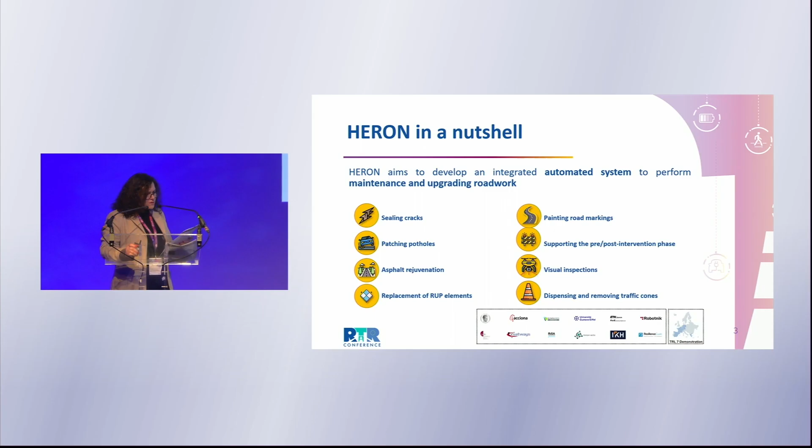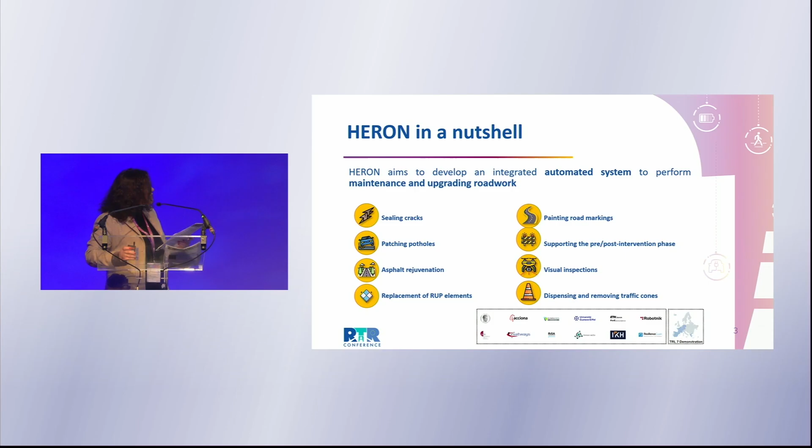The core philosophy of this project is automation and modular adaptability, focused on a single robotic system that can perform all the tasks. By integrating AI-powered vision, robotic automation, and real-time digital services, their project results will reduce manual labor and operational costs while improving safety.

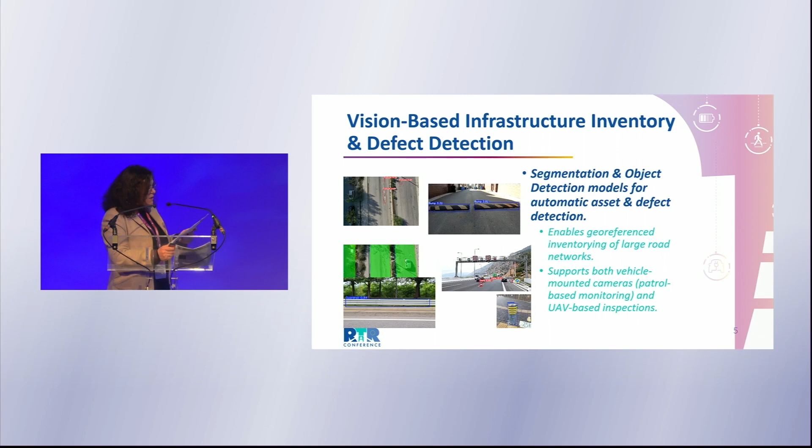So far, the results of HERON project are significant. Their technology allows for a georeferenced inventory of large-scale road networks. They developed two models: vehicle-mounted cameras enabling real-time monitoring via patrol vehicles, and UAV-based inspection providing aerial road infrastructure assessments. HERON project has developed an unmanned ground vehicle equipped with a robotic arm designed to do all-in-one road maintenance solutions.

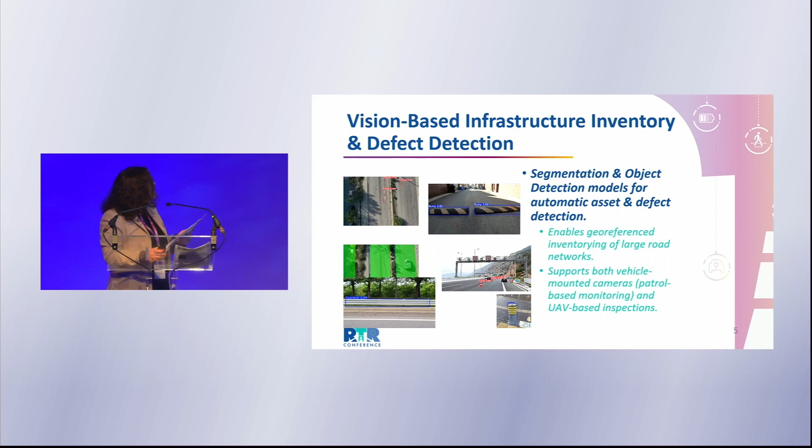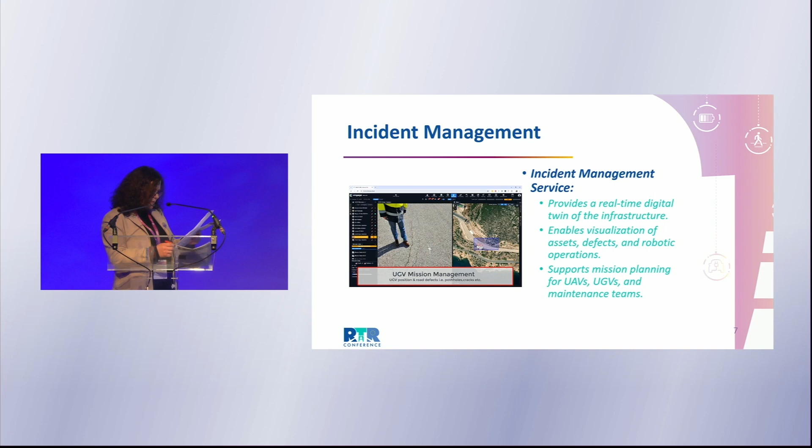For key capabilities of the HERON robotic platform, we have area closure, where the same robot is deployed to secure and seal all the surrounding areas, ensuring a safe working environment for road maintenance to begin. Pothole sealing is designed to automatically fill potholes and improve road conditions. Road marking repair ensures traffic lanes and other important markings remain visible, and crack filling pavers are designed to repair road surfaces by addressing cracks before they worsen.

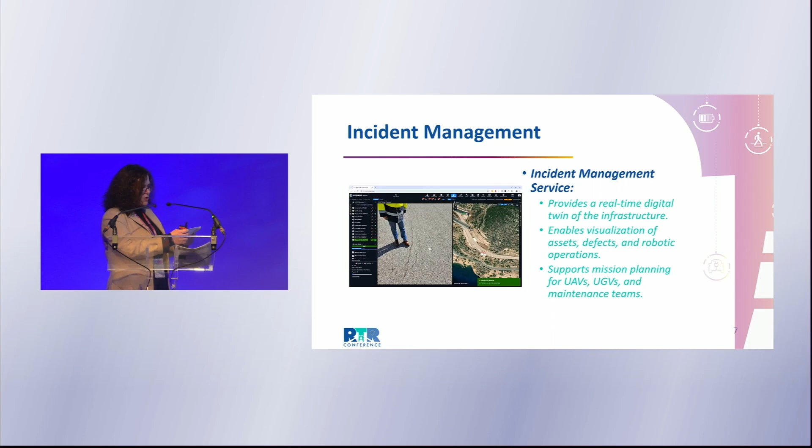Then we have the incident management service, which acts as a real-time view of the infrastructure with key elements like visualization of assets, defects, and robotic operations in real time, mission planning for UAVs, UGVs, and maintenance teams, and remote monitoring, which allows decision makers to track and supervise the maintenance operation from a centralized dashboard.

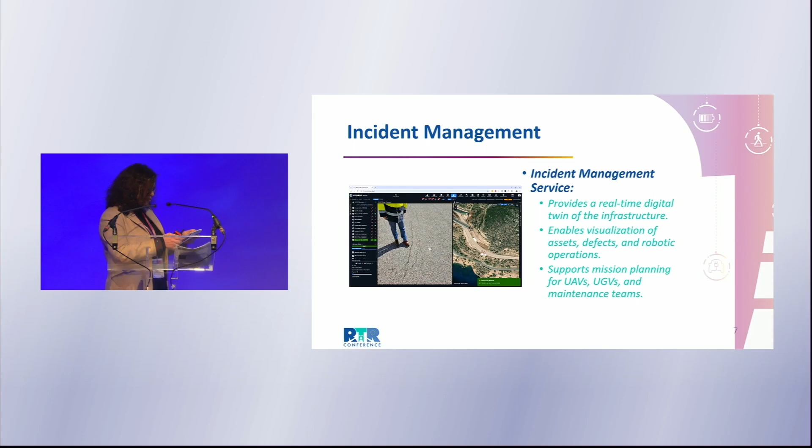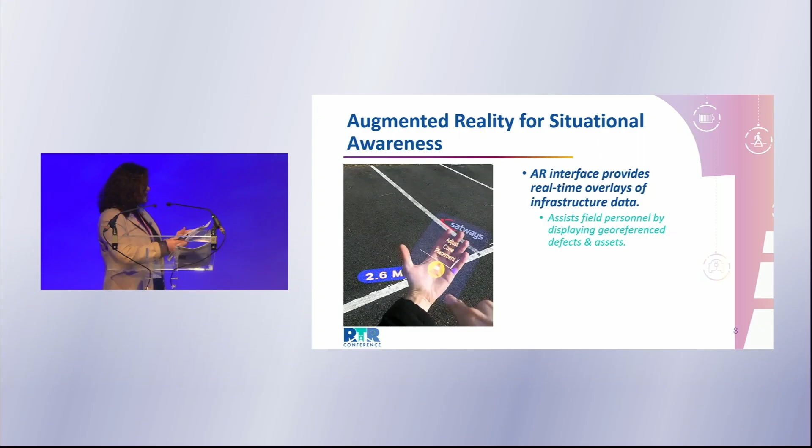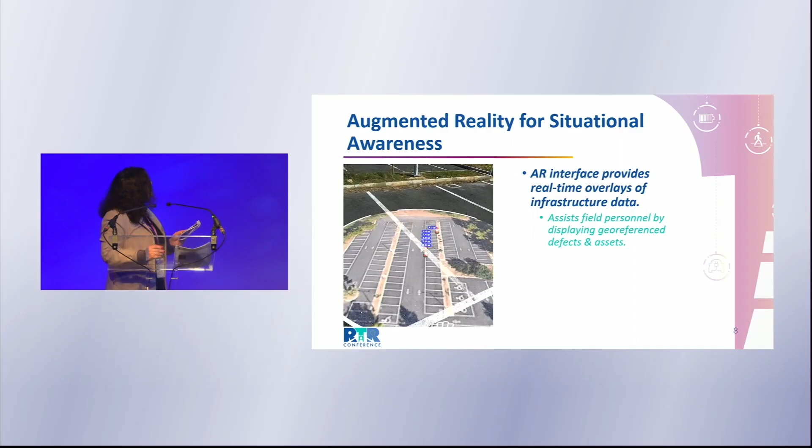And then the last element which HERON project worked on was the augmented reality, which provides real-time overlays of infrastructure defects and assets, which is presented in the short video.

For HERON project, we have two types of benefits identified so far. The short-term benefits are three specific points: faster detection and resolution of infrastructure defects, reduced manual labor, and improved road safety for workers, leading to a more efficient road maintenance operation. When it comes to long-term benefits: cost savings in infrastructure lifecycle management and data-driven insights to enhance urban planning.

HERON project can be deployed and scaled up in smart cities applications and other domains. For the moment, the project is in testing period and will conclude end of May, and the final project results will be presented in a final presentation later this year.

This is me, the PO, presenting in the shoes of coordinator. Sorry for not having such a nice presentation.

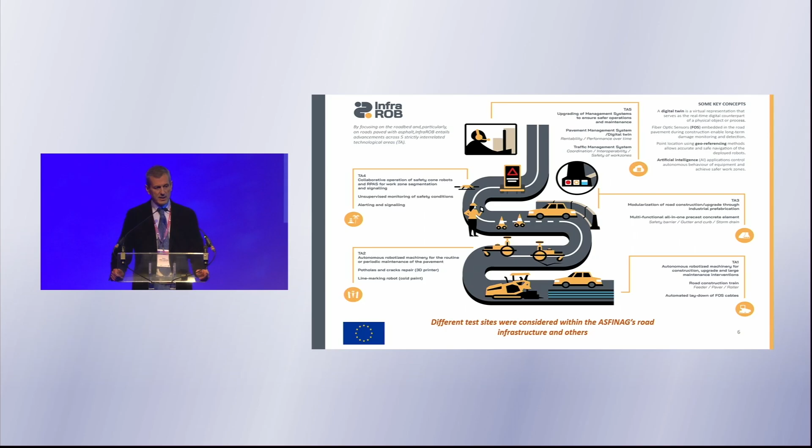The last but not least technological area was dedicated to upgrading management systems in roads, and we put the focus on upgrading the pavement management system and the traffic management system.

The main results of the project are included in the next 2 slides, and I made a summary of the main results of the project.

In this first slide, we have included 4 specific results, and the first one was a big robot for autonomous working in road construction and maintenance.

Some characteristics: it's a fully autonomous paver machine, no personnel required for the work of this solution. The control over 100 meters is about 1 centimeter, and the precision is more than 2 millimeters. The patent actions in this case are in progress, and the company is working on that.

The second solution developed in the project was for automatic cable laydown during the paving process, specifically for laying down fiber optic sensors, using these fiber optic sensors for damage monitoring.

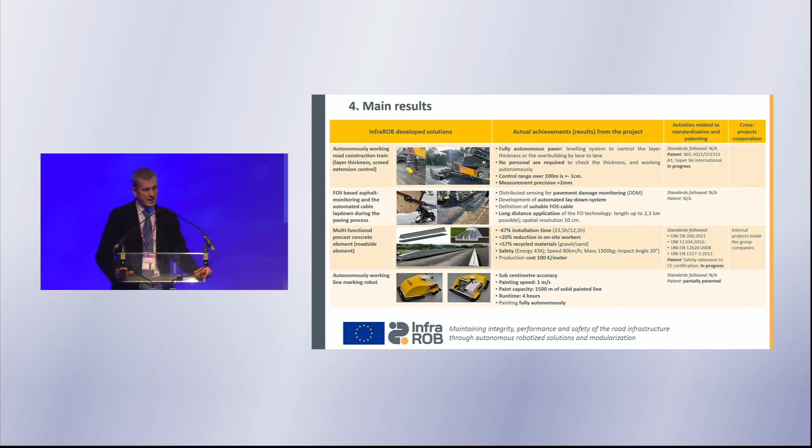Another solution, as I have commented before, was a multifunctional precast concrete component. The characteristics of this is all-in-one, including a drainage solution for roads, as well as the possibility to include inside the barrier facilities like power lines, fiber optic sensors for communications, etc. Some characteristics of this solution, like you can see in the slide, is that

installation time is reduced regarding the normal barriers, about 47% less reduction time, and the reduction in on-site workers is more than 20%. It was also made with more than 57% recycled materials, and the design considered safety measures. The production cost of this component is about 100 euros per meter.

The patent of this solution is in progress as well, and the company is working on that.

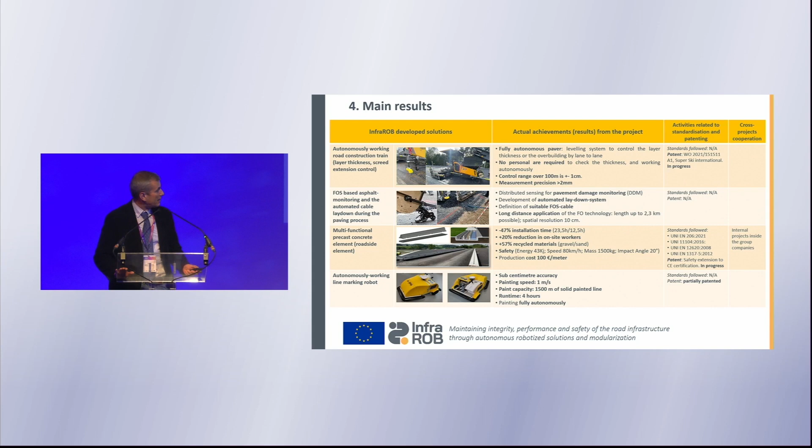Another robot is an autonomously working line marking robot. In this case, the accuracy is sub-centimeter, and the painting speed is 1 meter per second. The painting capacity is about 1,500 meters of solid painted line, working in fully autonomous mode. This solution is partially patented.

The other results of the project, like you can see in this slide, the first one is a robot or machine for autonomous repair of potholes and cracks. In this case, the characteristics of this solution is possible to work this machine with potholes about 20 centimeters diameter and maximum depth 4 centimeters. This solution includes a camera and an RPI device for location and volume characterization of potholes. The other important characteristic is the road section can be reopened immediately after the repair.

The next results of the project were cones and drones for safety. As I commented before, this was divided into two components for the safety of roads where workers are working. For that, the main characteristic of the drone is equipped with a camera and LiDAR sensors, and is possible to profile detection and tracking of vehicles, up to 20 new vehicles per frame, with 90 frames per second.

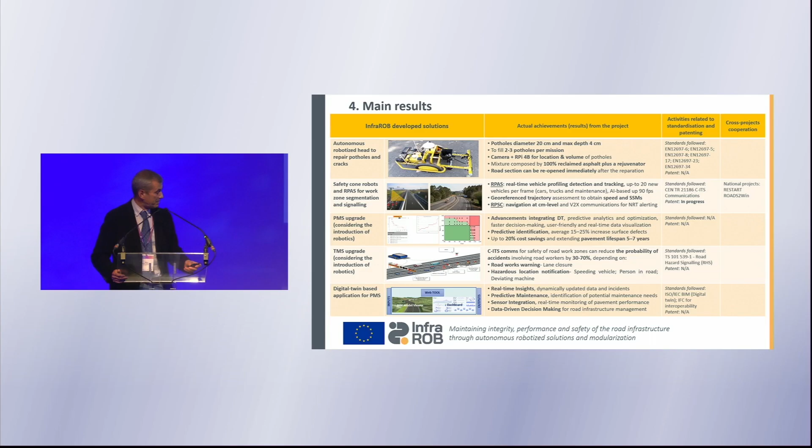It's also possible to integrate different sensors for real-time monitoring, specifically fiber optic sensors, for monitoring. Finally, data-driven decision-making for road infrastructure management is possible based on the digital twin.

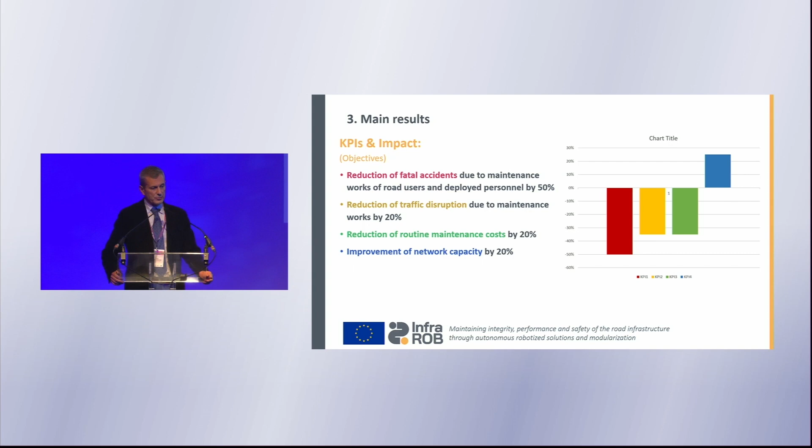When the project started, we fixed some KPIs considering the impact of our solutions, and we started with some figures, like you can see. For example, in reduction of fatal accidents, our objective was to achieve 50%, and we have performed to reach this number, 50%. The initial objective for reduction of traffic disruption was 20%, and finally we managed to reach 35%. For reduction of routine maintenance cost, the initial intention was to achieve 20%, and finally we reached

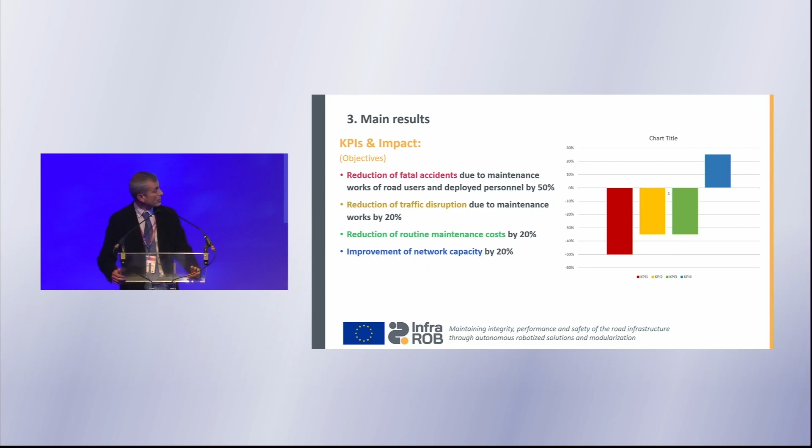35%. The improvement of network capacity, when the project began, target was 20%, and finally we obtained a KPI of about 25%.

Talking about the impact of the project, considering the mid-term and long-term, we have analyzed the impact and made an estimation considering five different components: technological, environmental, economic, societal, and input to policymakers. The figures we have estimated, considering the technological component, is that in the mid-term we expect a 5% extension of road pavement lifetime, and in the long-term our estimation is about 15%.

And the environmental component, we consider that the solutions of InfraROB can reduce emissions by 5% in the mid-term, and to the mid-term and long-term, our estimation is to reduce it to 20%.

Considering the economic impact, in the mid-term our estimation is to increase the efficiency of the allocation of resources between 10-15%, with a reduction of number of workers and cost from 4 to 2 people, and in the long term, reduce the paving time and workers' labor cost to zero.

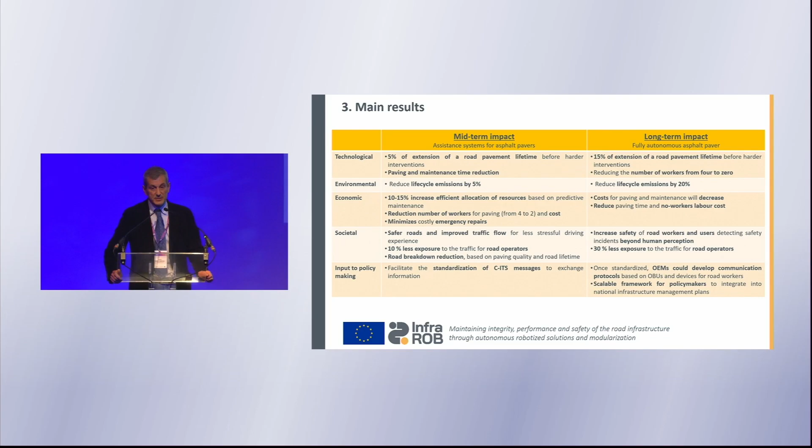Finally, regarding input to policy making, with the results of the project, the impact in the midterm is to facilitate the standardization of the C-ITS message. In the long term, once standardized, OEMs could develop communication protocols based on OBUs and devices for road workers. Let's go to the last slide.

The last project from the cluster of 3 projects funded under the 2020 call is OMICRON, presented by José Solís Hernández. It's also dealing with automation and optimized maintenance. Thank you.

Good afternoon everyone. First of all, thank you to the organizing team for inviting us to present our project today. As Claudia said, my name is José Solís, and I work for the R&D department of CEMOSA, and I'm also the project coordinator of OMICRON, which I have the pleasure today to present to you.

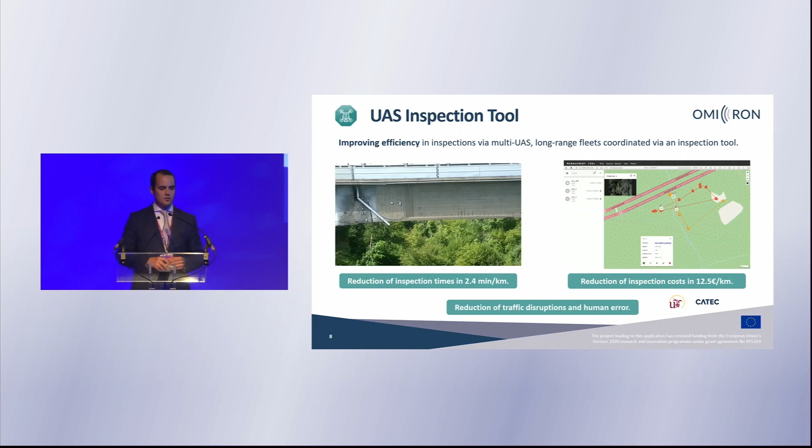Moving on to the next block of technologies, we talk about the OMICRON intelligent platform composed of the digital twin and the decision support system. I always like to start by defining what we understand by digital twin, as it is nowadays a buzzword which we hear in many areas. The concept was the development of a virtual replica of the infrastructure based on a BIM-GIS-oriented environment, providing capabilities towards asset visualization, asset state prediction, and simulation capabilities towards decision-making.

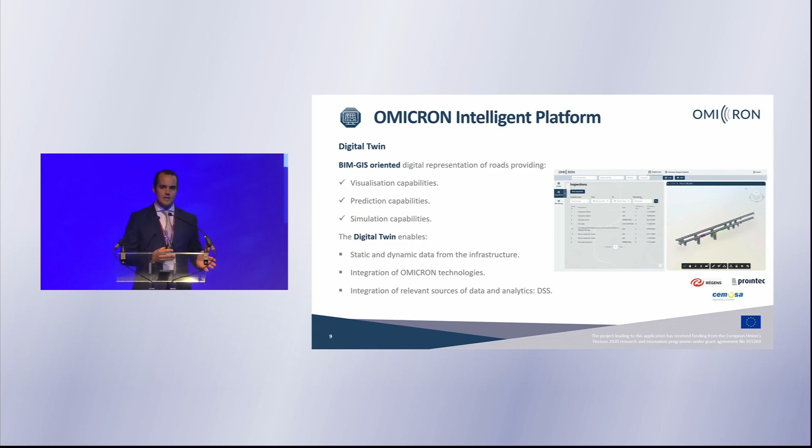The digital twin enables connection to static and dynamic data, the integration of all sources of data from the project, and the integration of relevant sources of data and analytics from the decision support system. With respect to this decision support system, the objective was the analysis and prediction of asset condition and also traffic state in order to improve the way in which we schedule maintenance.

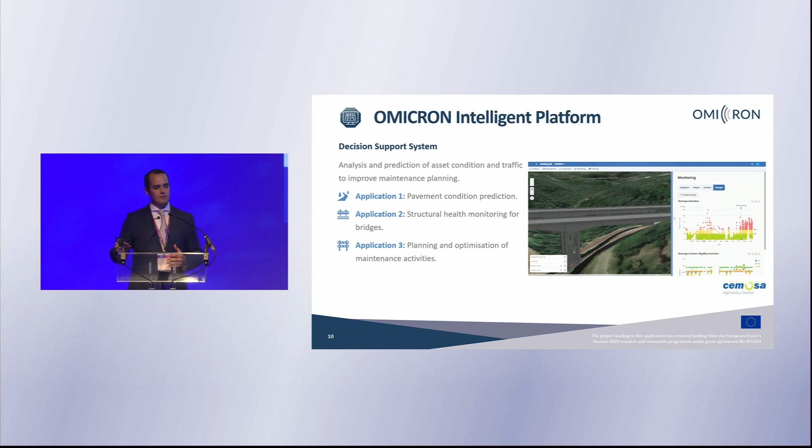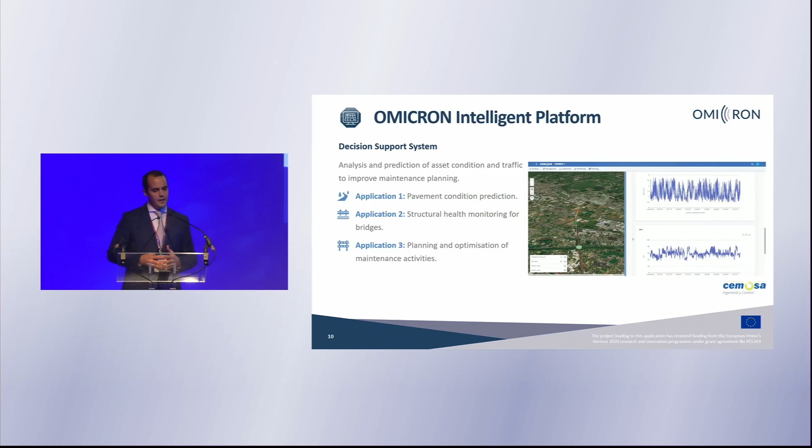So within OMICRON, we focused on three main applications. The first one was pavement condition prediction based on historical data. The second area is structural health monitoring on bridges using IoT data. And the third area is focused on planning and optimization of maintenance activities using the information from the other two. These three applications were integrated in the DSS, in the Zenbox digital twin platform developed by Cemosa, and you may see the results in this short video.

Going a bit more into detail into the second application, we worked on structural health monitoring of bridges, and we developed a methodology starting with IoT data and defining a continuous operational modal identification, the development of a routine to remove environmental and operational variables. We developed a finite element model and surrogate models for the bridge that we analyzed.

We developed a module for damage detection and a control chart, and last but not least, we performed inverse optimization using AI to identify damage.

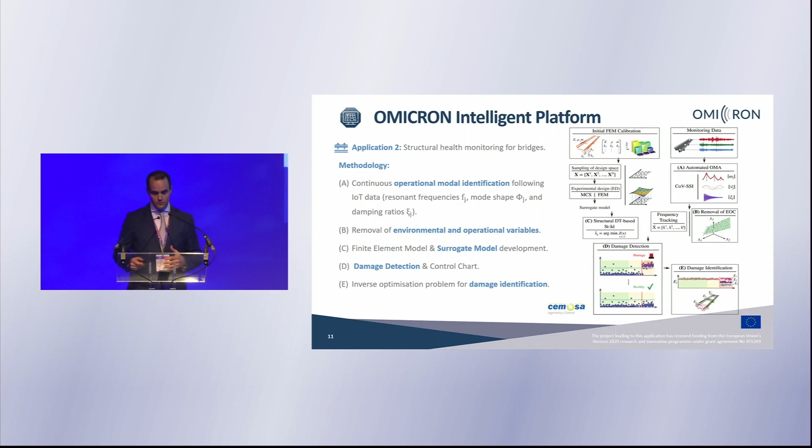This leads to the third application, again focusing on planning and optimization, where we followed five main variables: priority, degradation, average queue length, average delay during maintenance, and average delay due to traffic disruptions. The objective was to develop an optimization algorithm in order to optimize the assignment of work zones to time intervals, as well as the definition of work zones according to certain configurations, depending on the needs of the particular work zone.

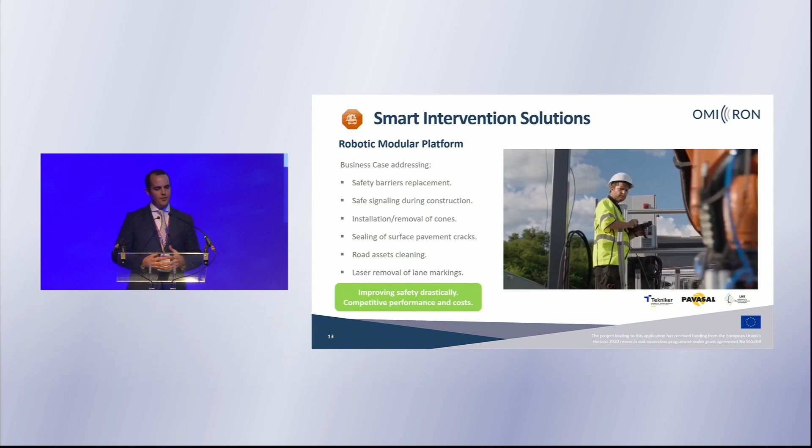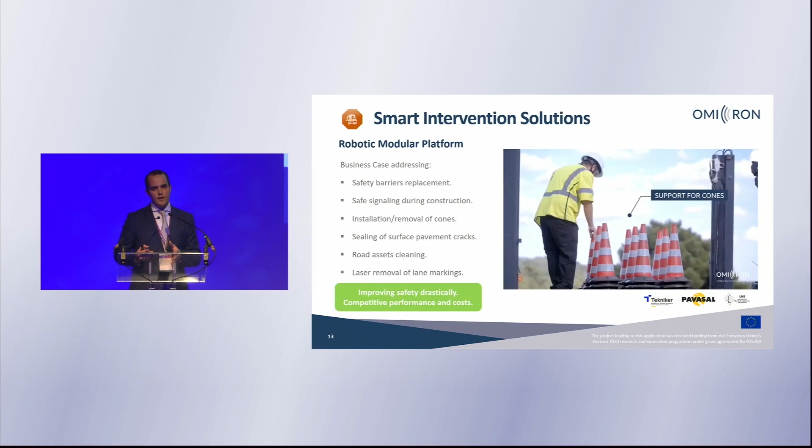This leads us to the final area of development of the project, which is focused on smart intervention solutions. The project developed a robotic modular platform based on a business case in which we didn't want to only address one maintenance intervention action, but various of them.

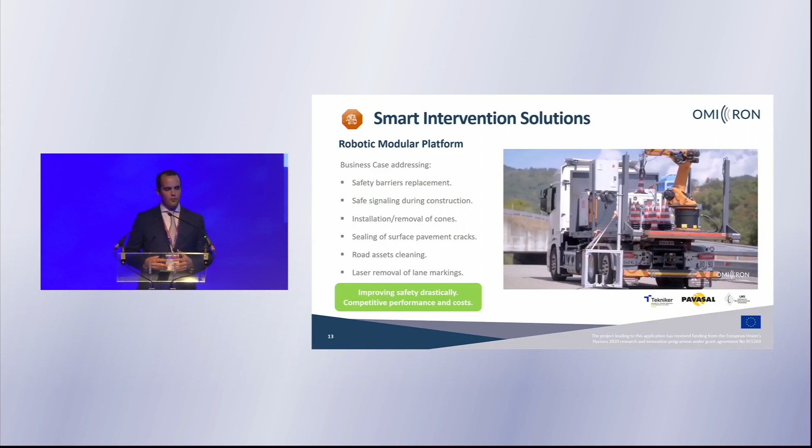So the robotic modular platform has been developed to cover safety barriers replacement, installation and removal of cones, safe signaling during construction, sealing of surface pavement cracks, road asset cleaning, or laser removal of lane markings.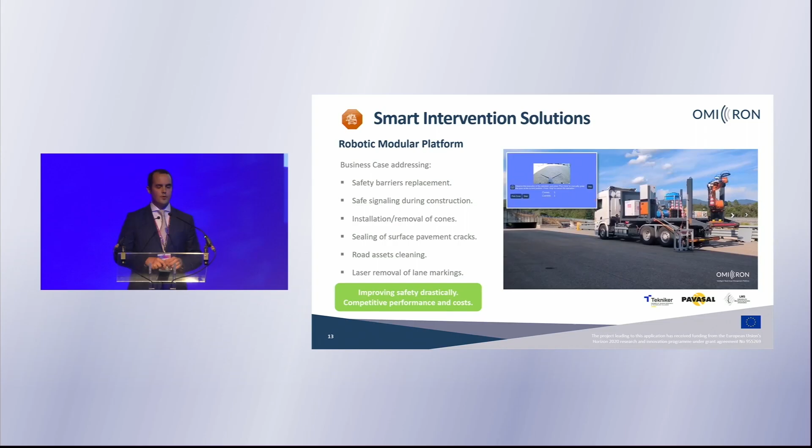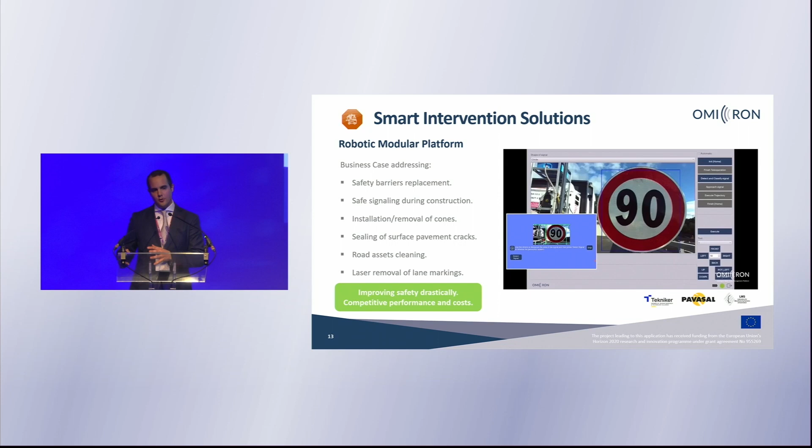The result has been a drastic improvement in safety, removing workers from hazardous areas, while maintaining competitive performance, time and costs, especially in certain applications.

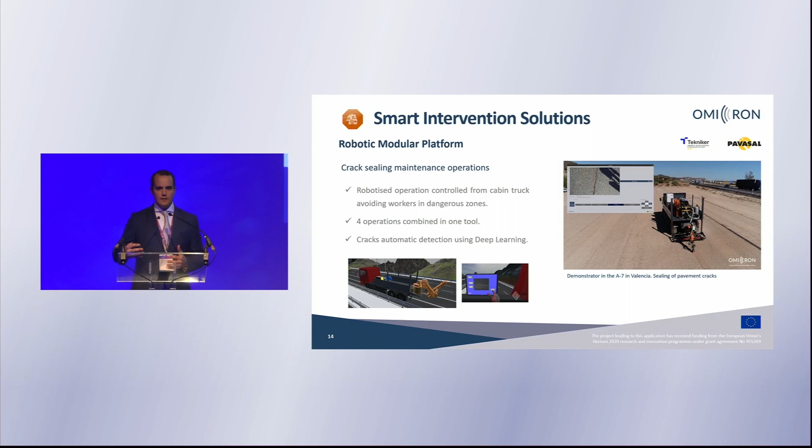One of the most promising ones is the one related to crack sealing in maintenance operations, where a full robotized operation has been developed, creating a tool which integrates four operations at the same time: cleaning, heating, applying bitumen, and applying aggregates, and performing an automatic crack identification and path using deep learning technologies.

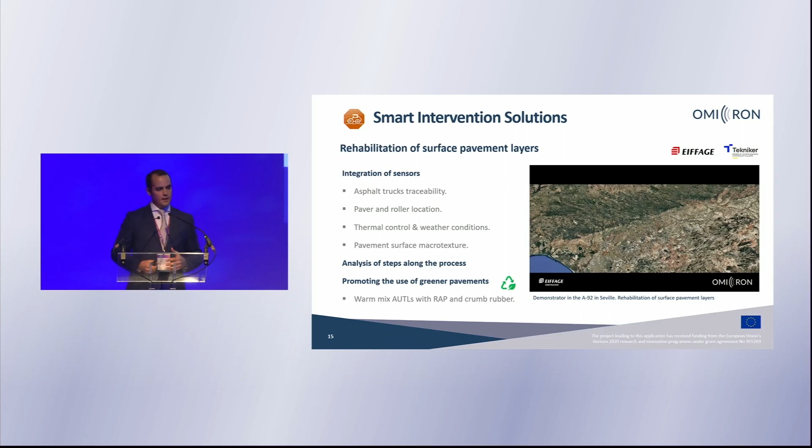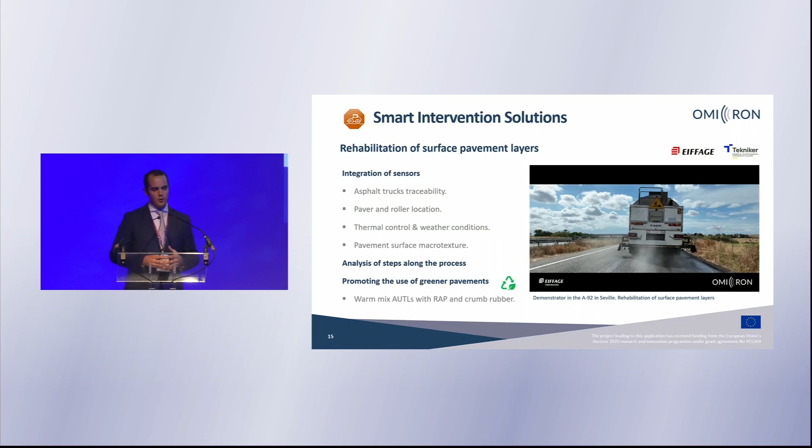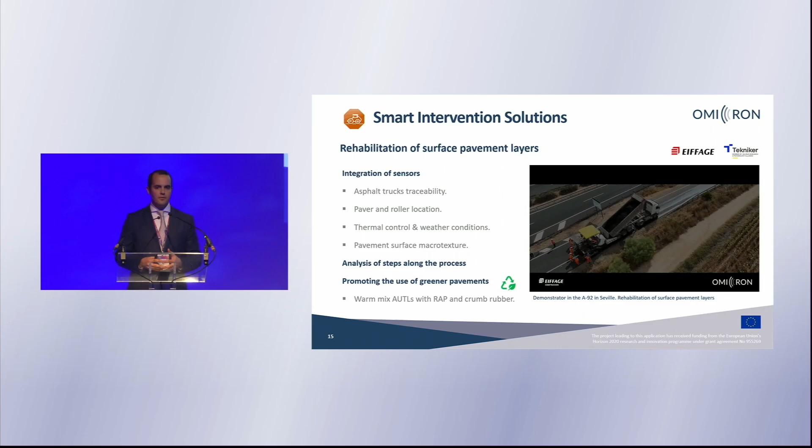Last but not least, the project also addressed the rehabilitation of surface pavement layers, installing sensors throughout the whole process, such as asphalt truck traceability, paver and roller location, thermal control and weather conditions, as well as macro texture monitoring. This allowed the analysis of the whole process and all of the steps within it, promoting also the use of greener pavements, including asphalts with recycled asphalt and crumb rubber.

As I said in the last part of the presentation, I would like to talk about how we demonstrated the project and the impact of OMICRON. So, how did we put this into practice?

We had a clear methodology in order to arrive at TRL7, starting with preliminary testing at TRLs 4 and 5. Then we moved on to technical demonstration of specific technologies at TRLs 5 to 7. And last but not least, most importantly, we developed a final demonstration of the platform at TRL7 as OMICRON's final showcase in the A1 from Florence to Bologna, hosted by Autostrade per l'Italia.

This enabled us to evaluate how the technologies did within the framework of the project based on 14 KPIs that, as Pedro presented, elaborate on 4 main KPIs: the reduction of fatal accidents of road users and deployed personnel by 60%, the reduction of traffic disruptions due to maintenance by 32%, the decrease in routine maintenance costs by 39%, and the increase in network capacity by 20%.

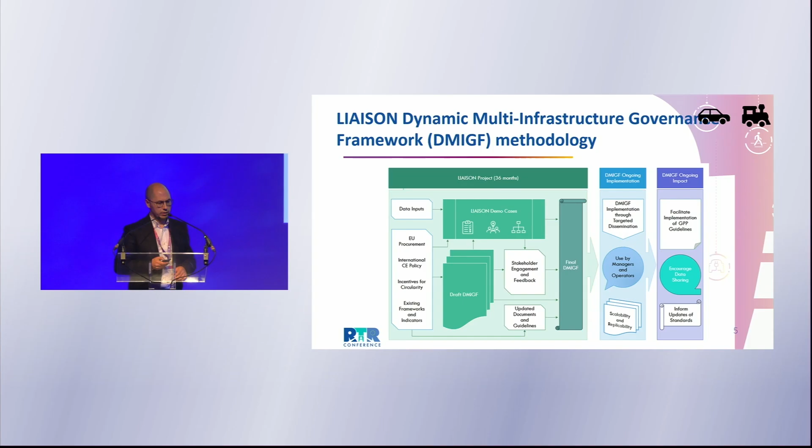Zero transition. So, on the one hand is the material, but on the other hand is the design. We have developed a complete new design based on different standards in the USA, but the main and important point is the possibility to assemble and disassemble as many times as needed, theoretically, trying to close the loop and make the reuse concept as real as possible.

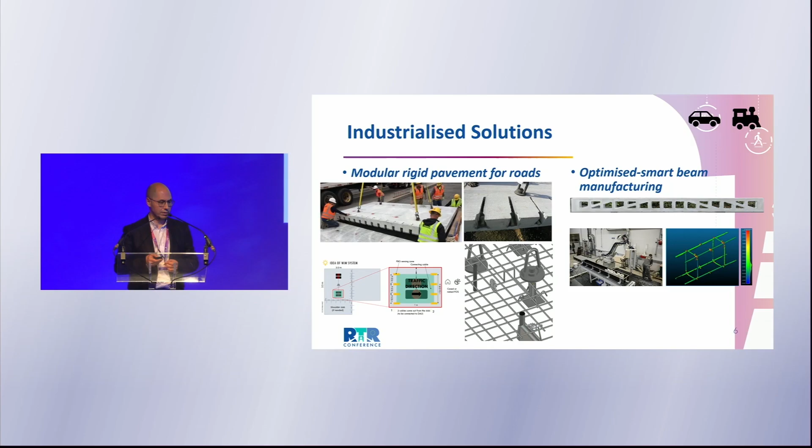Of course, the positioning and location of the different elements and parts has been done using different digital tools, and in parallel this allows it to be created and managed with the digital system, because it's exactly the same. We have equipped this beam with fiber optic sensing.

If we talk about circular solutions, we are putting the focus in the LIAISON project on the bioasphalt pavement and also on the low noise and vibration circular railway track ballast for railways. Regarding the bioasphalt, the idea is to maximally reduce the use of bitumen through the use of these new bio-binders that you see here.

I don't know if you are familiar with them, but there is a list of them. During the project, we have been testing, trying to analyze the most convenient one according to the framework we showed at the very beginning. That's why at the bottom you see technical aspects, circularity aspects, cost, environmental, and social aspects as well.

On the right part of the slide, you see the low noise vibration circular railway track ballast. This is a solution we are working on with the Slovenian railways, and the idea is to provide a solution to a problem common to most countries in Europe: to improve the mechanical performance of the traditional ballast they are using, and also improve dynamic behavior and noise.

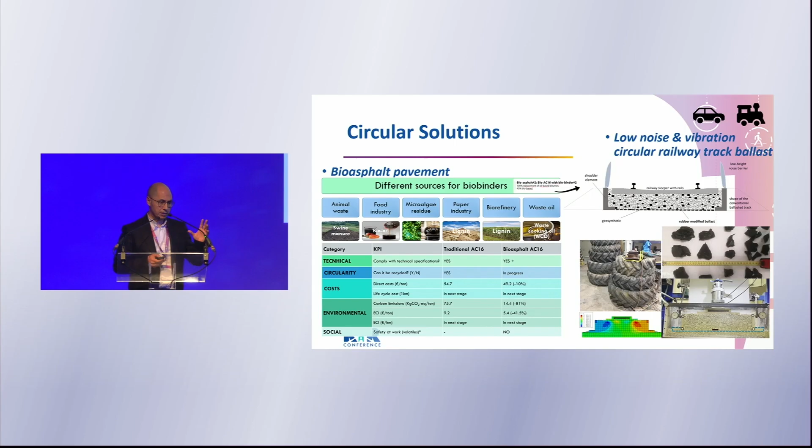These are the solutions from the circular perspective. Finally, the solutions for operation and maintenance are mainly focused on three areas. The first one is tunnel energy optimization.

Here we are talking about minimizing energy consumption in terms of lighting and tunnel fans. To do that, we are working in parallel: on one hand, defining different scenarios to be more agile in managing lighting in the tunnel, and on the other hand, working with frequency variators in the tunnel fans, to trigger them when necessary while balancing consumption and the quality of the air we need to assure.

The second one, in the middle, is a photovoltaic guardrail. This is a solution we are developing with Vita Italia and our colleagues from Tecnalia. The idea is to keep the guardrail with a new element integrated into the existing one.

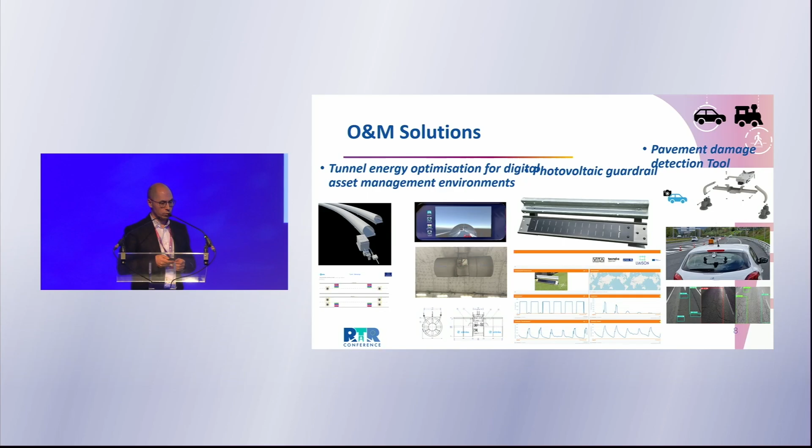This is being developed in collaboration with the ministry in Spain, and like the rest of the solutions I've presented, it will be tested during the demo part of the project, in the last months.

Regarding cross-project cooperation, as Jose mentioned before and as Claudia suggested during our last meetings - this is a message to Irina - we need to create a final event in 2026, hopefully as successful as the one from OMICRON, InfraROB, and HERON. Also, paying attention to the A in the acronym our colleague mentioned in the previous presentation, we need to be more associated.

Regarding the mid-to-long-term expected impacts of the project, as you can imagine it's quite early to give figures and numbers about all of this. But I'd like to emphasize some points that we clearly see at this moment, which I think are important for the last period of the project.

Regarding the LIAISON Dynamic Multi-Infrastructure Governance Framework, the DMIGF, it's useful for us to frame all the technical solutions, but it's also allowing us the possibility to launch real tenders to bring our solutions to the market. This is something we're really proud of at this moment, because we're finding the way to give the solution to the real world and to construction companies, by writing these tenders and bringing them into the real process. I think this is really interesting, in line with such innovation actions.

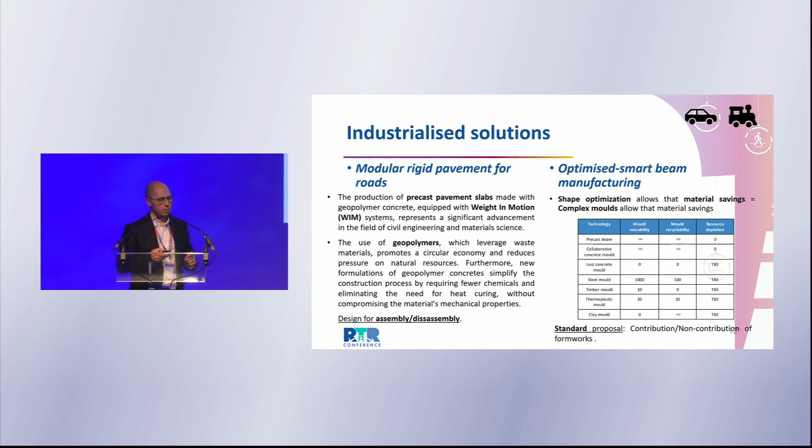Regarding smart beam manufacturing, nowadays we are starting different discussions, because we see that the molds, the formworks you see at the very beginning, are key to the solution. We are analyzing whether they have some kind of structural contribution or not from the structural perspective. Thanks to the collaboration of our colleagues working on the Eurocodes from the structural side, we are discussing this point nowadays.

Regarding the circular solutions, particularly the bioasphalt pavements, we are identifying some barriers regarding the supply chain. Biobinders are sometimes difficult to access, and this relates to what we heard before about the A of associative in HERON. If we want to be ready for the challenge, we need to work together in a collaborative way. So we clearly start seeing that biobinders could be a problem.

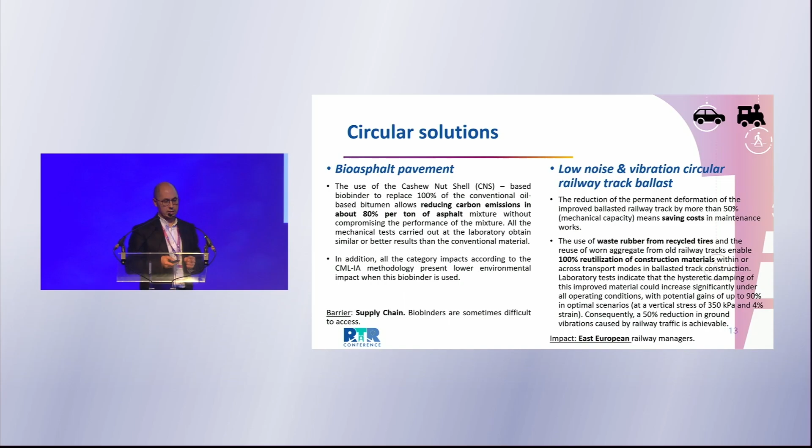Regarding the low noise and vibration circular railway track ballast, we are confident these solutions could be extendable to the rest of the East European railway managers, as common problems.

Finally, for the operational maintenance solutions, in particular regarding tunnel energy optimization and the digital twin, this solution can be extensible not only to road but also to rail, metro, mining, and the industrial sector. All the sectors working with tunnels or underground structures.

The photovoltaic guardrail, we see, and we are working also on other applications for other road and rail components.

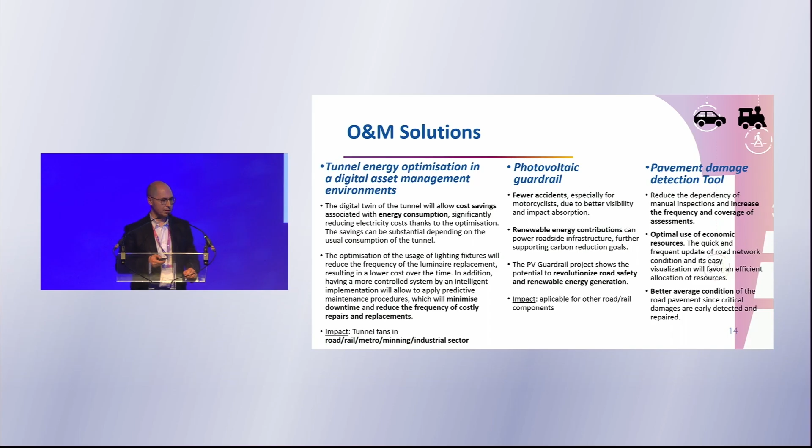Regarding the pavement damage detection tool, as I told you before, the main important thing is that we are recording video while driving at 80 kilometers per hour. That is a very nice speed considering the rest of the solutions. We are very happy with this evolution of the solution.

So this is all for my side. I'm hoping in 2 years I can give you more specific figures. Thank you very much.

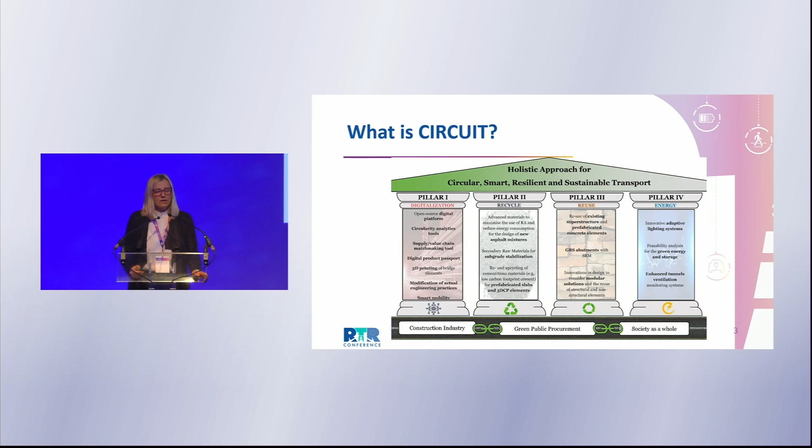This picture shows the main concept of Circuit. It relies on 4 pillars, overall covered with a holistic framework which should enable circular, smart, resilient, and sustainable transport. Our 4 pillars are digitalization, recycle, reuse, and energy. In each of them we have a number of innovations that will be implemented and demonstrated at the pilot projects. An important difference is that we are an innovation project compared to the first 3 projects, so we aim to demonstrate, implement, and validate solutions at TRL level 7, 8. At the bottom, we try to link the construction industry with society as a whole, because that's actually most important, that whatever we improve is relevant for us as a whole society.

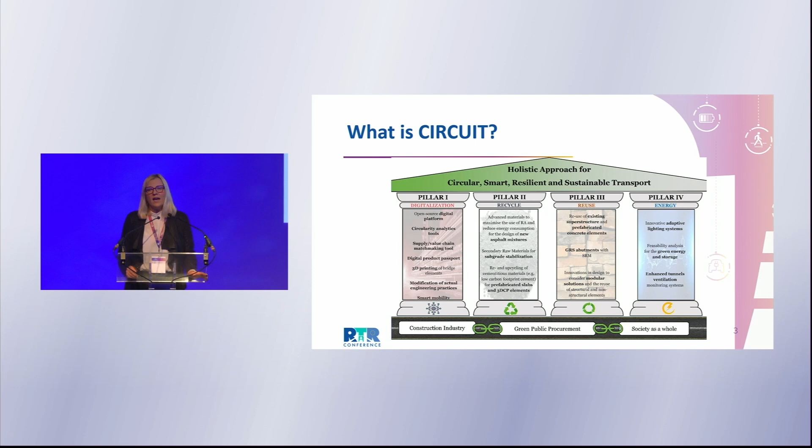And the link we see as green public procurement. So I will go through our pillars and what has been developed so far. Please follow the project on all social media, and we will try to be very informative.

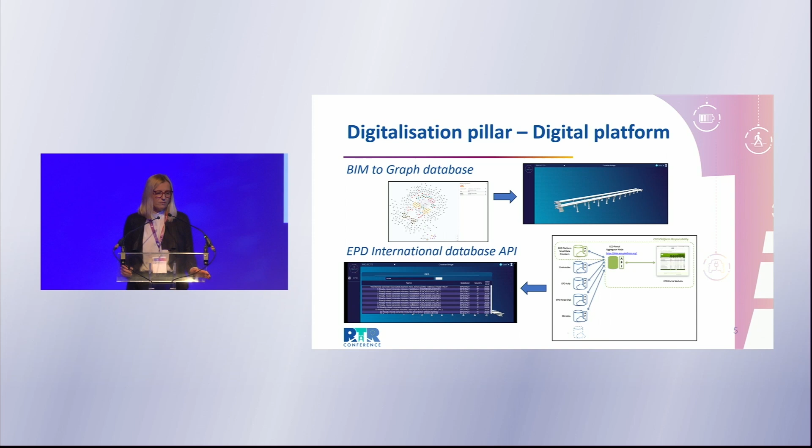The general digitalization concept is that we are integrating all solutions into a digital platform, which will be BIM and GIS based, but what should be innovative is that we want to link existing databases to new tools. For instance, a lot of products have been certified or declared EPD, Environmental Products Declarations, but unfortunately they haven't been implemented or used overall in our projects. So for this link, we are going to use an Innovative Graph database to connect existing information to our existing and future projects. The next integration is development of digital product passports.

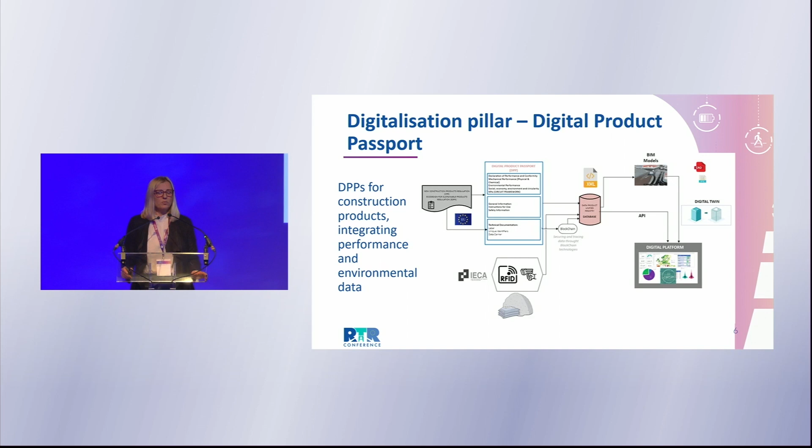These digital product passports should be similar to CE sign or certification of all our construction products, but now with a chip or barcode, which should trace each product from birth to the end of life, or hopefully a new life, with integrated information about all the resources, energy, and environmental impacts, and finally where they could be reused in the future. We are testing right now with the Spanish Institute for Concrete and Cement RFID chips, which we are building into the concrete. They will also be implemented into the bridge beam and then reused finally in the bridge.

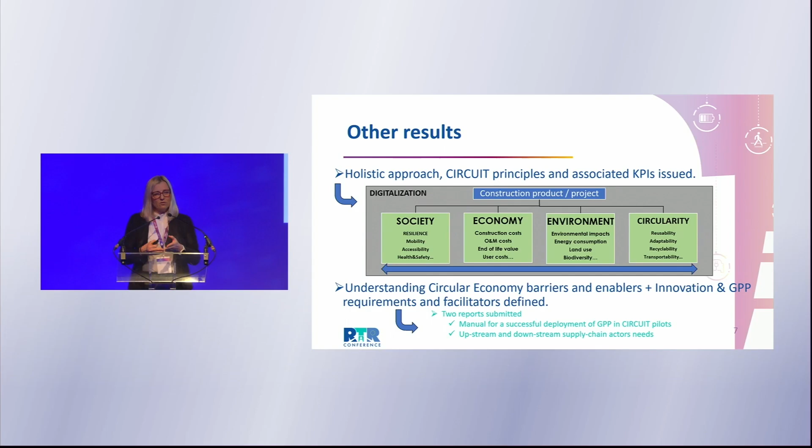The KPI framework which we have developed covers 4 aspects. We published a deliverable with all quantified KPIs, based on existing frameworks and standards, plus some new additional ones, starting from material, product, element, then system, then network, and society as a whole level. So how do we link design or an existing project and fulfill requirements for the final use?

One tool we developed and are now applying for different design solutions is the Circularity Analytics tool, now developed for bridges. Let's assume we have all our existing bridges. The owner of the highway wants to know how many of the existing bridges can actually be reused, how many can be dismantled. The point is we don't want to demolish, crush, and downcycle - we want to keep the elements for reuse.

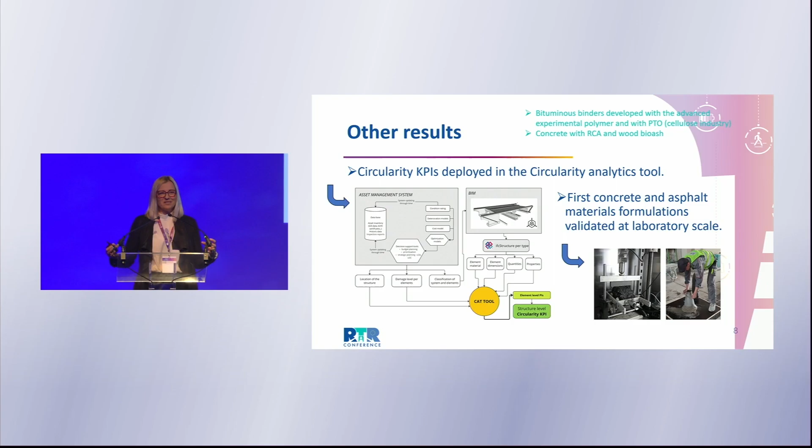So we try to make it an automated process - we have a BIM model, or if we don't, we have to scan and develop one, and then automatically get the KPIs showing how many elements can be reused. We already faced lots of lack of information, because the most important thing is how to disassemble - it's important to have defined connections, accessibility, transportability, etc. But we are really looking forward, and we are aiming to make this into a product.

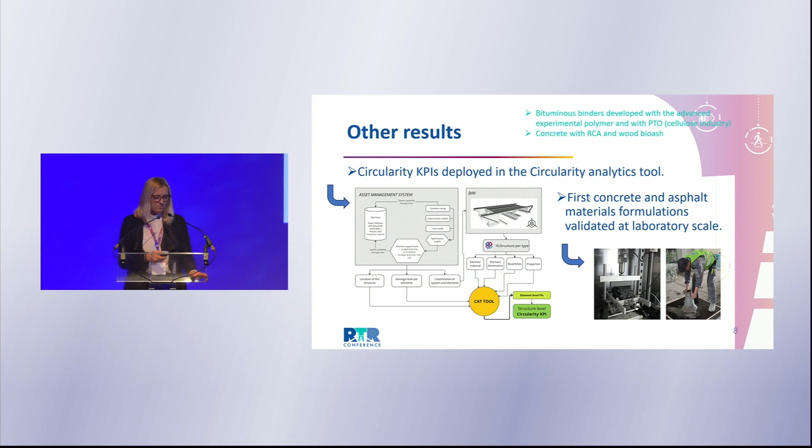We have 5 pilot projects, and luckily we have owners of those road infrastructure locations as partners, which ensures full commitment and implementation of the solutions. We have 2 highway owners - Italian ANAS and Croatian Motorways, plus MITMA from Spain. We also have a Slovenian municipality and a Dutch water board, owner of the flood protection system.

In Slovenia, we are going to build a bridge from reused structural elements, focusing on the beams but also on reuse of the abutments, as well as developing 3D concrete printed side elements and fences with the implementation of recycled materials.

In Italy, the focus is on solutions for energy - low energy solutions for ventilation and lighting. In Croatia, we are focusing on digitalization, applying the Circularity Analytics tool and a supply matchmaking tool, which I haven't mentioned yet, to link future projects with existing resources.

In Spain, we are focusing on implementation of asphalt with recycled and bio-based materials. And in the Netherlands, the focus is on geotechnical structures - implementation of soil strengthening and implementation of recycled materials or waste in soil strengthening.